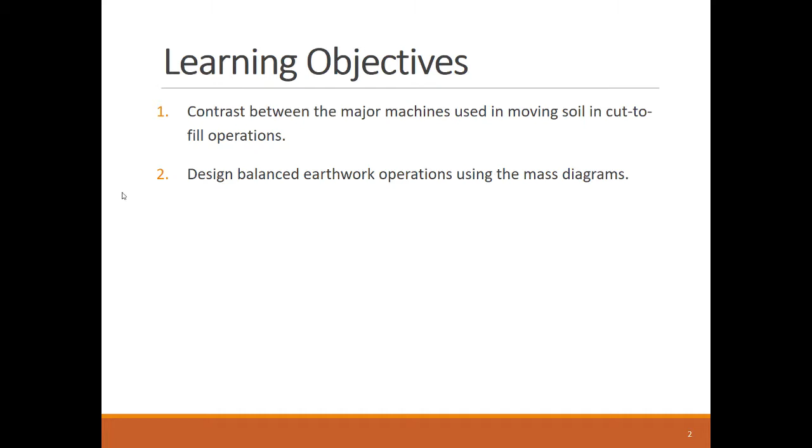This video covers the shown two learning objectives.

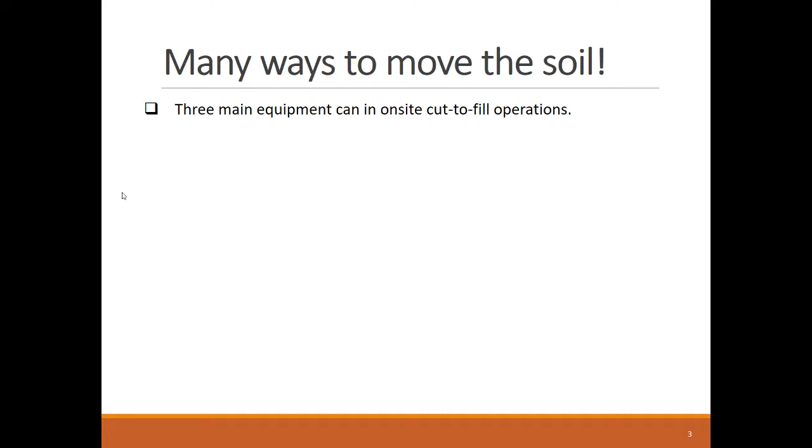There are three main types of earthwork equipment that can be used in cut-to-fill (CTF) operations: trucks, scrapers, and dozers. To best explain their differences, let's watch some videos.

Here you can see a dump truck being loaded by a loader in the cut area. The truck is an off-road truck because it's large and cannot drive on our regular roads and highways within the standard lane width. You can see other equipment pieces also working, like these two dozers.

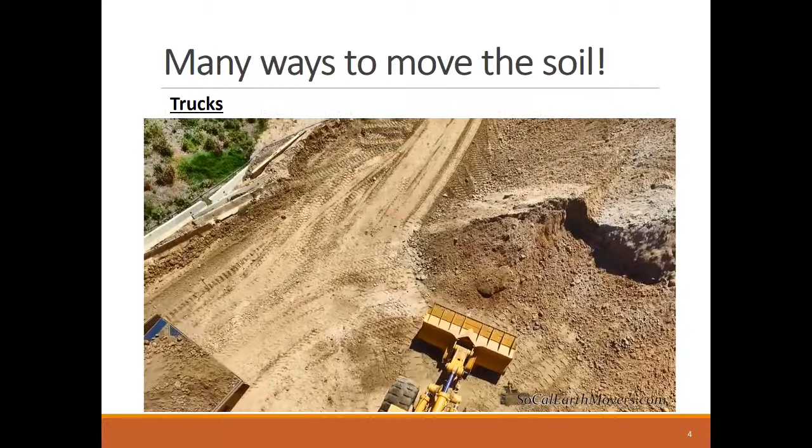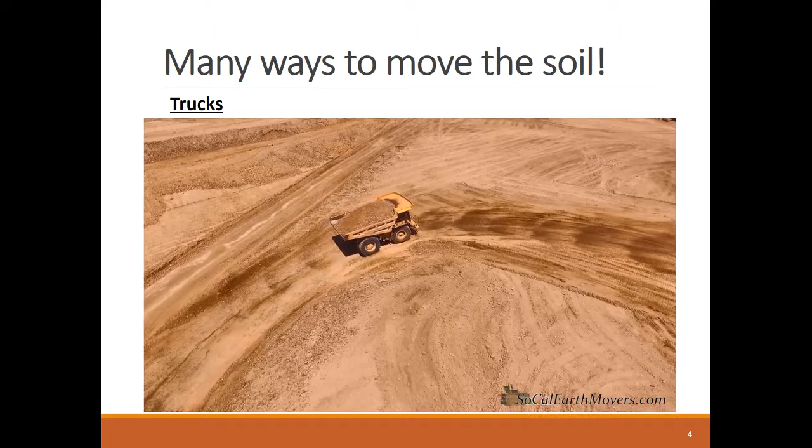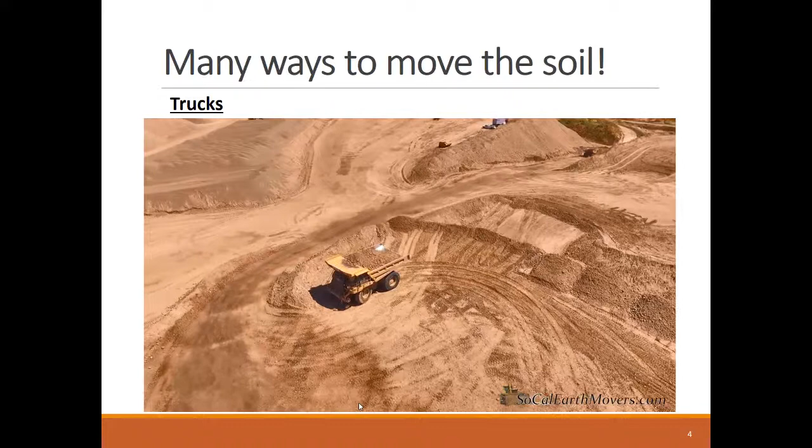The truck finished loading and now is heading to the fill area. The truck arrived at the fill area and will start dumping its load. Afterwards, it will go back to the cut area.

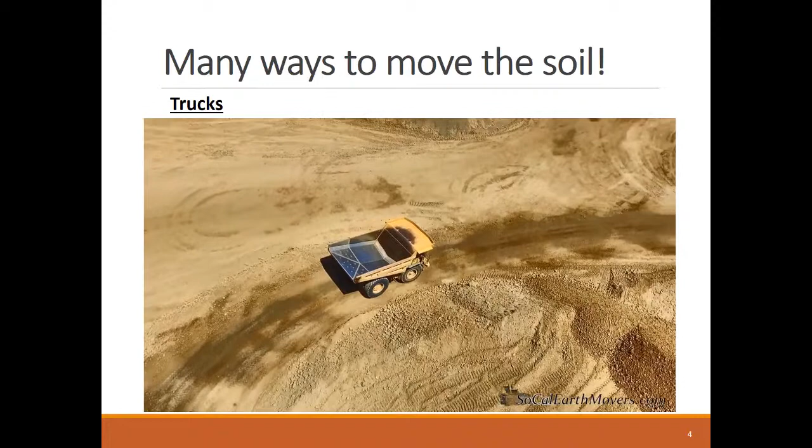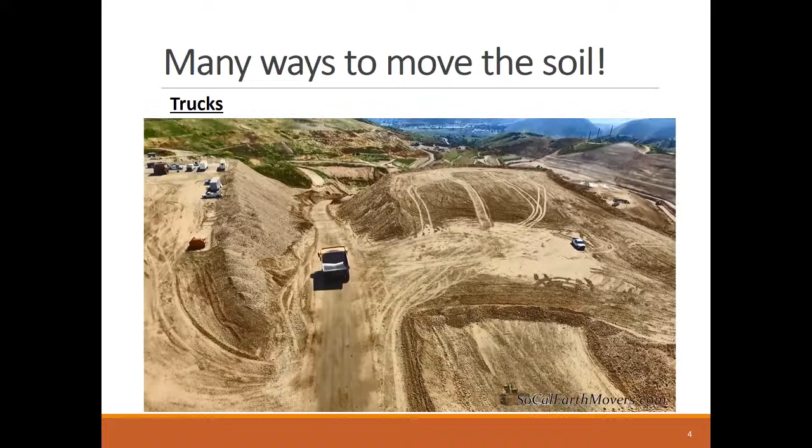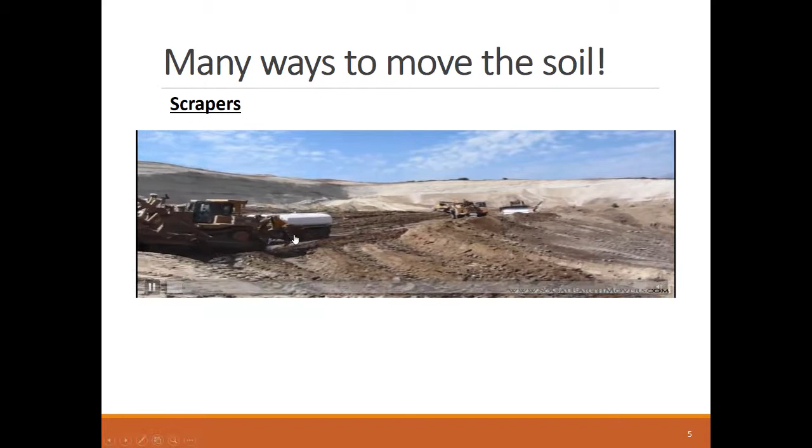Here's another video to see scrapers in action. As you can see, there's a water truck spraying water to reduce the dust and also to make it easier for the equipment to drive on the soil.

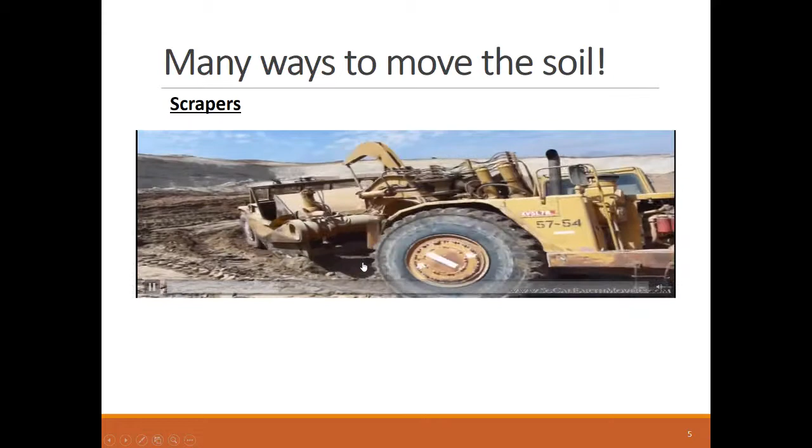Here you will see a scraper coming and just scooping the soil in its belly. You'll see also another scraper doing the same. This happens in the cut area, and the scrapers take their loads to the fill area.

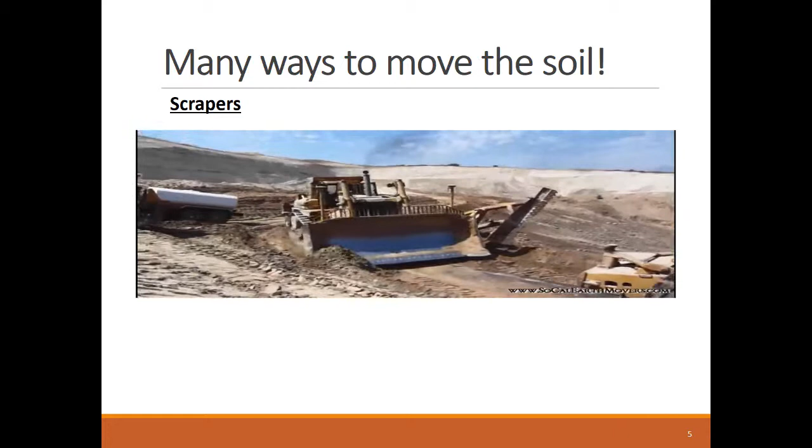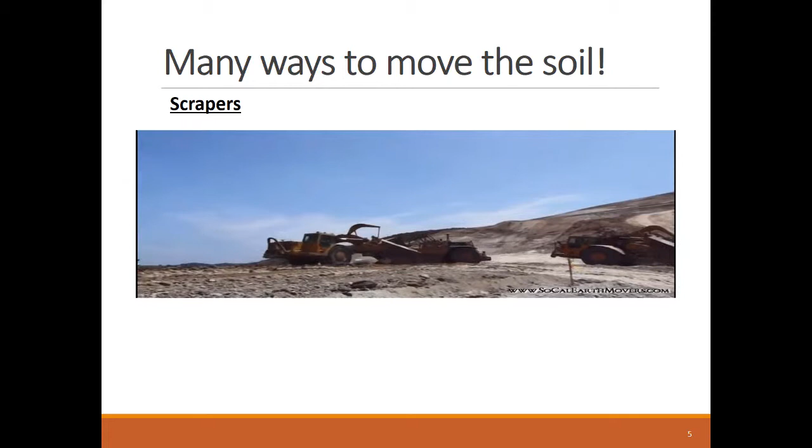The scraper arrives at the fill area and lowers its belly and opens it to drop soil. Pay attention to the soil, how it goes out of the belly below the scraper. Unlike the trucks, scrapers dump their loads in layers of soil, not piles.

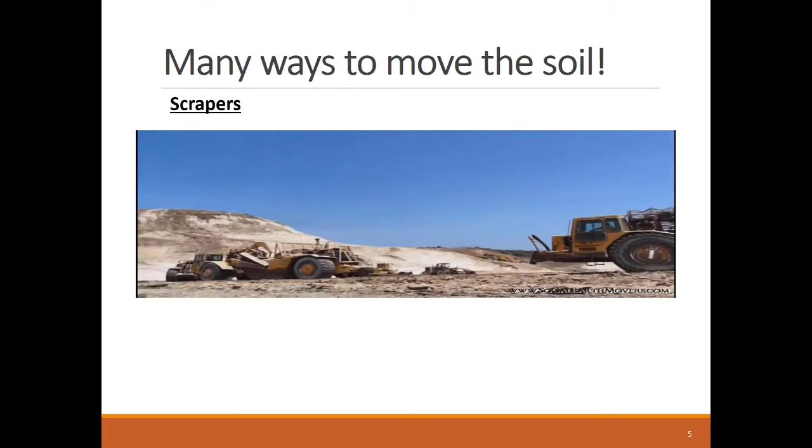After the scraper finishes the load dumping, it turns around and exits the fill area to return to the cut area.

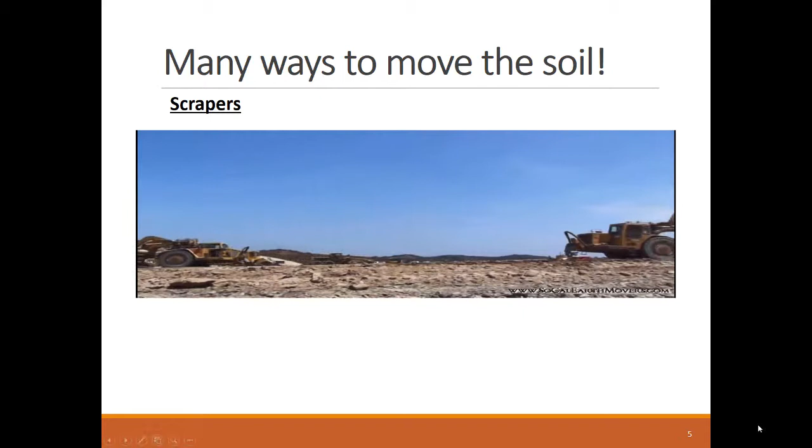Here's the final video embedded in our presentation. Here you can see a D11T Caterpillar dozer with rippers in the back, pushing the soil from one cut spot to a fill spot nearby.

It's that simple. The dozer cuts the soil top layer accumulated in front of the big blade, pushes it to the fill spot, and then returns back to the cut spot.

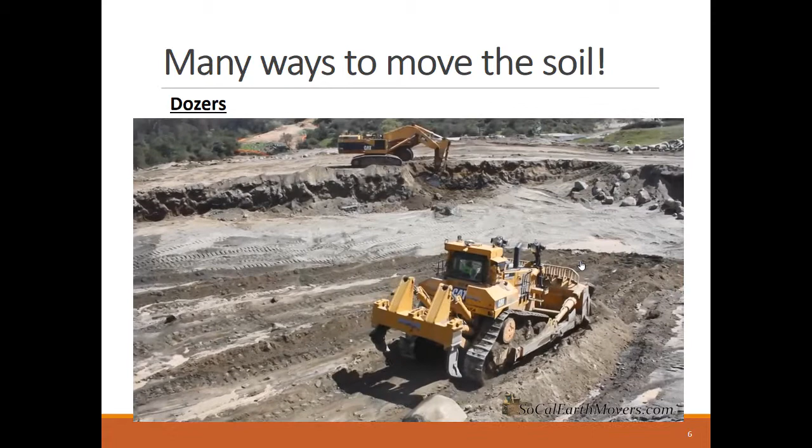So after watching the three videos, we can conclude that every equipment is designed to perform a specific cut-to-fill operation. At least two equipment types are needed: trucks, and loaders or excavators. Scrapers can operate by themselves, but they can also assist each other or have assistance from a dozer to have a little push when scooping and loading the soil.

Finally, dozers can work by themselves. We'll learn about each of these equipment types in detail in the future.

Also, we saw in the videos that trucks can operate for longer hauls. Scrapers are better for medium hauls, while dozers are for short cut-to-fill earthwork. We call these optimal haul distances for the different heavy equipment economical haul distances.

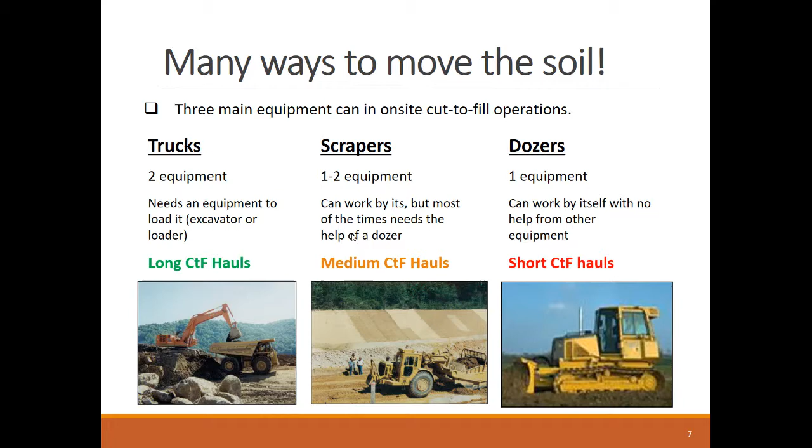For very short hauls, dozers are the best equipment to use for balance zones of up to 300 feet wide. For longer distances, up to 5,000 feet, scrapers are the recommended equipment. Finally, trucks are the most mobile equipment for hauling due to their original design advantage.

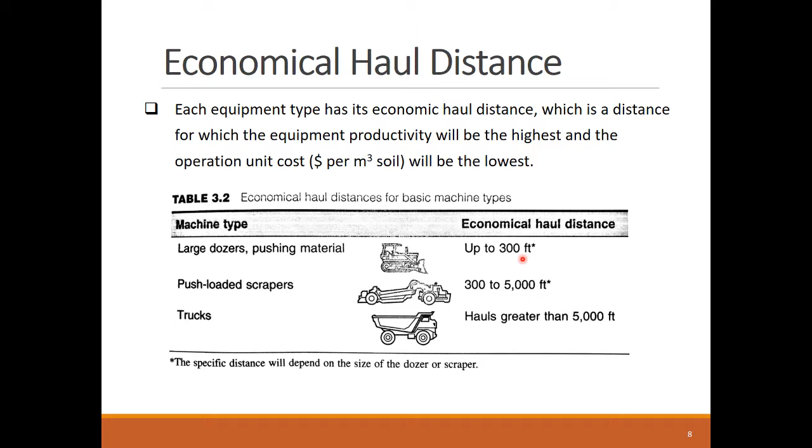Imagine from the dozer video if we use the dozer to push the soil for the same distance traveled by the trucks. We would have waited for every truck to deliver just a blade load. On the other hand, it does not make sense to load the truck by a loader so it can move the soil for just 300 feet distance, which is about 4/5 of a football field.

We can use the economical haul distance to design an efficient cut-to-fill operation by identifying from the mass diagram the cut-to-fill zone for each equipment type. We can do that by fixing a balance line for each equipment to its economical haul distance and trying to find its place on the mass diagram that intersects with the diagram at the ends of that line.

For the shown mass diagram, we need to identify the zones where the scrapers and dozers will work. We set two balance lines equal to the scraper and dozer economical haul distance. Then we find the zone where the dozer's balance line will snug within the mass diagram.

The dozer zone is now identified with its haul quantity and the average haul distance, which we will cover in the second part of this lesson. We can do the same for drawing the balance line of the scraper to visualize its cut-to-fill zone.

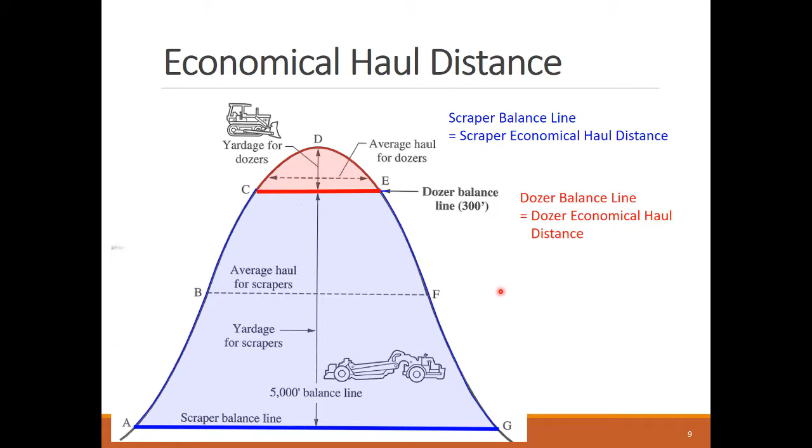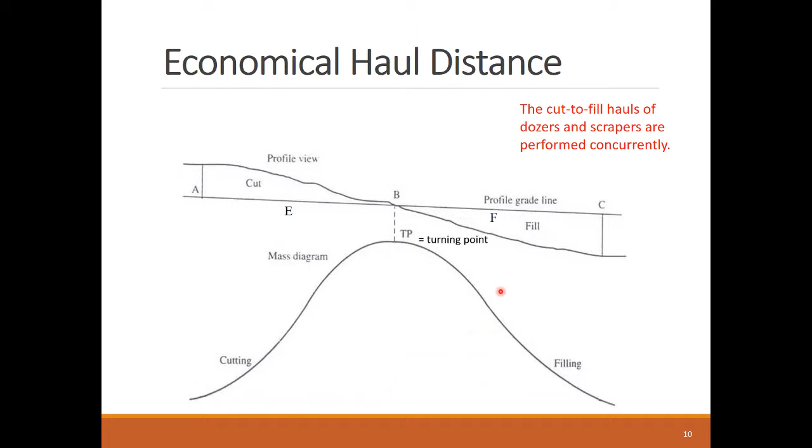Here is another example to visualize the cut-to-fill zones and their physical hauls. Here you can see how to use the economical haul distances to identify the dozer and scraper cut-to-fill zones, like we did in the last slide.

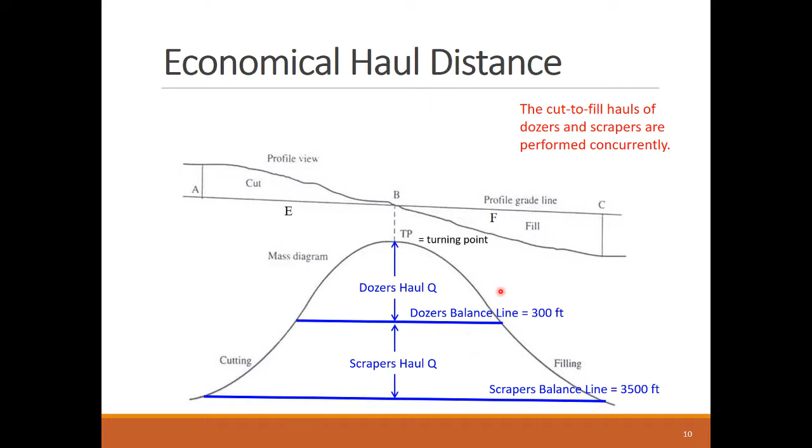Then we can identify the total quantity or yardage for each equipment and the boundaries of the cut-to-fill zone. We can notice that the scrapers pass by the work zone of the dozers, so it's critical to have close coordination between their CTF operations to make sure haul routes of the scrapers are not blocked or not excavated or filled at an acceptable rate by the dozers.

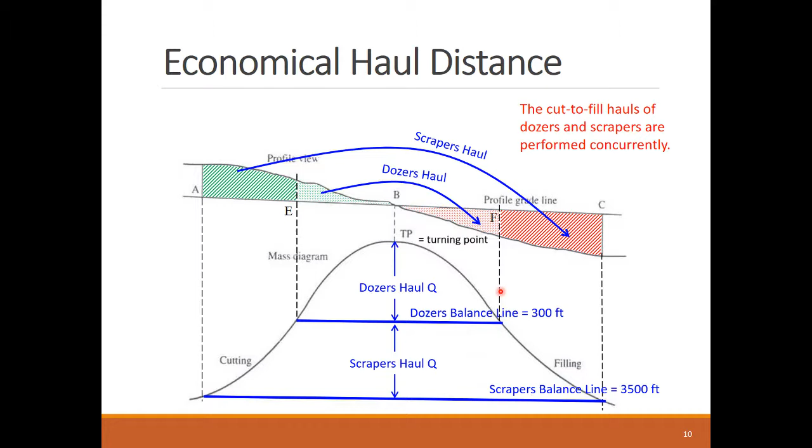I hope you enjoyed this video about different equipment used in CTF operations and how their economical haul distance can be used to identify their work zones.

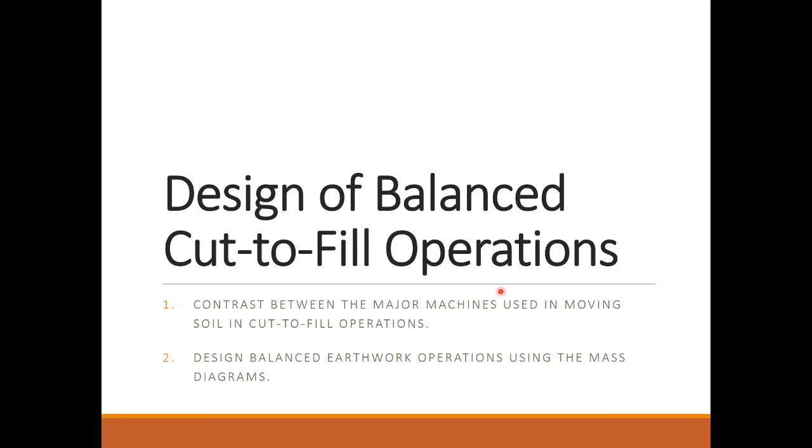In the second part of this lesson, we'll learn about how to calculate the haul average distance and the yardage for each CTF operation and zone. Take care.